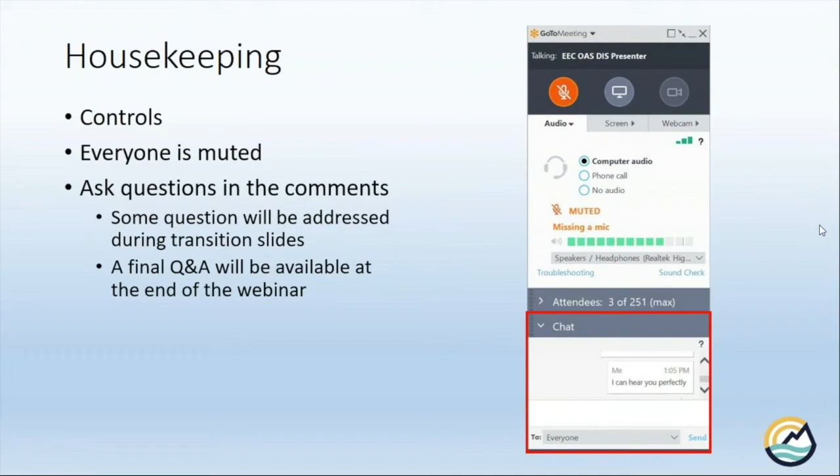Quick outline, we're going to talk about the old permitting process. A lot of you guys are familiar with that. And then we're going to talk about the new general permit. We're going to give you a quick overview. And then we're actually going to dive into the permit itself. So the email I sent out to everybody should have had the floodplain general permit attached to it. So if you want to open that up and follow along as we go through, I tried to organize this in the same manner that the general permit's laid out.

So we're going to talk about the permit coverage. We're going to talk about exclusions and eligibility. We're going to talk about permit requirements and other conditions, and then we're going to talk about finding and using the general permit.

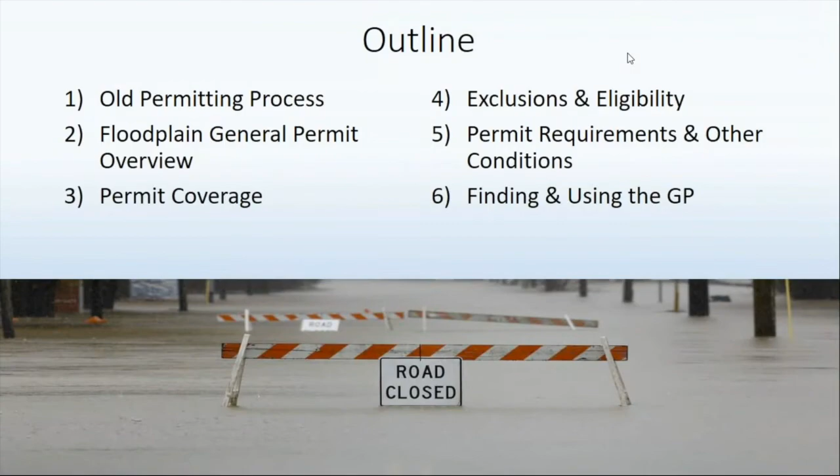So floodplain permitting. So KRS 151.250, that is the Kentucky Revised Statute that gives the Energy and Environment Cabinet and the Division of Water, as part of that cabinet, the authority to require floodplain permits anytime you're working along or across a stream. So the statute, really all it's telling us is that we shall issue a permit. It never really said how that permit had to be issued.

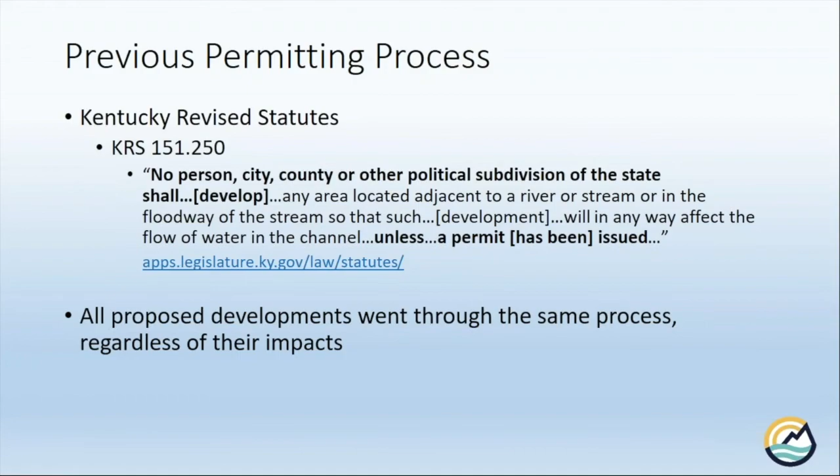So for the longest time, no matter what you were doing in the floodplain in Kentucky, you went through the same process, regardless of if you are a half-mile long load-out facility on the Ohio River loading into barges, or if you are planting a tree in your backyard. Doesn't matter. We treated everything the same for the longest time.

What we were kind of finding is as we were requiring these stream construction applications and the public notice, we were finding that for some of the projects, you were spending a lot more time and effort getting it permitted than the project actually took itself. Or another factor we also saw frequently was the cost to run the newspaper notice cost more than the project would itself. So we were really doubling the cost of what people were wanting to do.

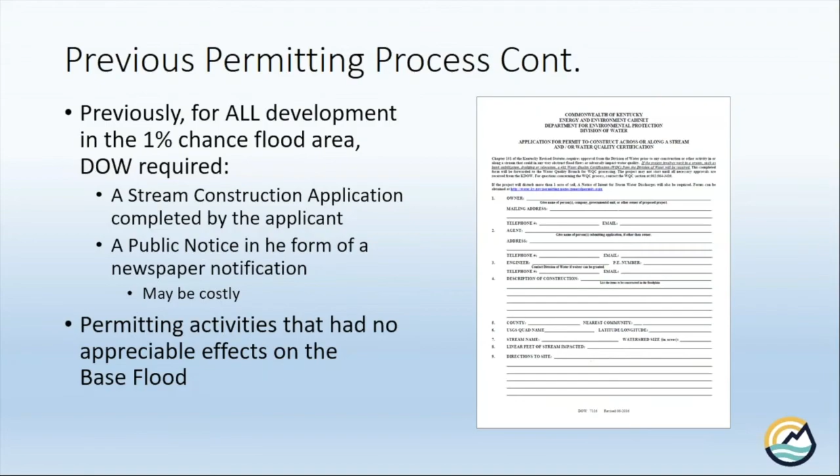We also found that, we have 8 people in the floodplain management section at Division of Water, 5 of which are engineers. We had a lot of very intelligent people spending a lot of time on things that really didn't affect the base flood or the base flood elevation. So what we decided to do as we were looking through our regs and trying to decide how can we make this better, we came up with the idea of issuing just a general permit.

And so what this is intended to do is, we spent all of 2019 and the first couple months of 2020 putting this permit together, trying to decide what do we want it to cover, what do we not want it to cover, what mechanisms do we need to have in place to enforce it and make sure people are complying with all of the federal and state requirements. That was our big key. We wanted to issue this, but also still meet all of our federal and state statutory requirements.

The general permit was public noticed back in, I believe it was late April, early May 2020. It ran for a month. We received comments from several different sections, biggest being the Home Builders Association of Kentucky. We reviewed all the comments, we addressed everything, and we actually sent letters back to everybody who commented. And then as of July 1st of this year, the general permit went into effect.

When that happened, I actually emailed copies out to all of the local coordinators that are on the call. I sent a copy, it would have been about July 9th or 10th, I believe, as well as we updated the Division of Water's website to where you can find the general permit online. We'll talk about that later in the presentation.

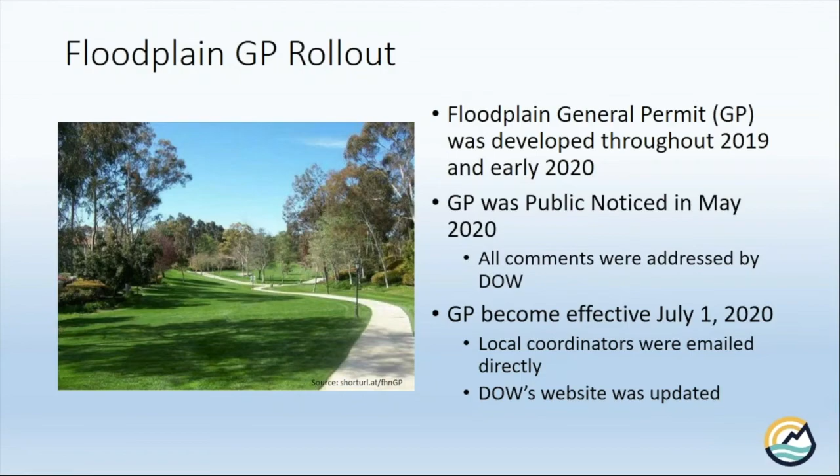So the general permit, essentially what it is, is it's intended to just give out essentially blanket coverage for certain activities that have no appreciable impact on the base flood. So there are some things you can do where, no matter how big or small the stream is, you're not going to affect the base flood when it happens. So that's what we regulate, the 1% chance flood. So when you hear me say base flood, that's what I'm talking about, is the 1%, or what they used to call the 100-year flood.

The general permit pre-approves those activities, and it has already done the public notice, so it meets that statutory requirement. And it's available to anybody in the Commonwealth. So whether you are a private citizen, a community, or anyone else, the general permit, if you can follow everything in it, applies. We modeled this permit after what the Army Corps of Engineers does with their 404 permits for the Clean Water Act, and what our water quality section does with the 401 certifications.

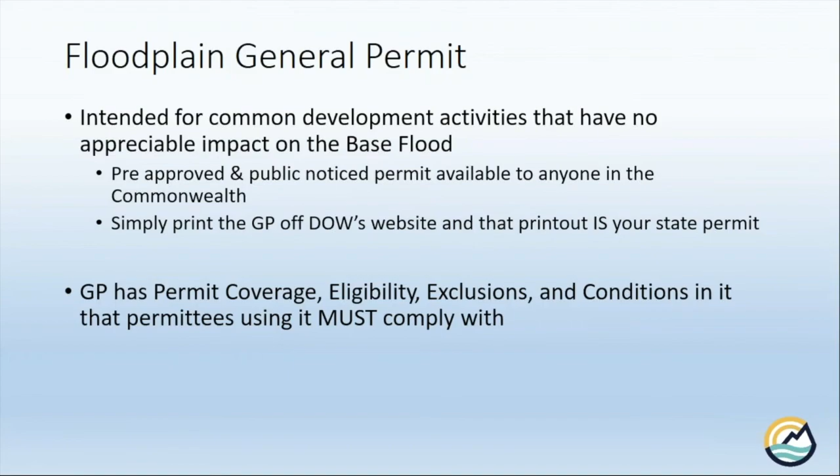So the printout that you get off of our website is your permit. You don't have to apply, you don't have to run a public notice. That printout, once you print it on paper, is your permit. The general permit has permit coverage, eligibility, exclusions, and conditions that whichever permittee is using it has to comply with. And that's what we're going to spend the majority of this presentation talking about, is what are those different sections of the permit? What are they talking about? What are they trying to convey?

So again, guys, if you have questions, I am monitoring the chat box. Feel free to ask questions as we go through. So if you have the permits in front of you, great. We're going to just, like I said, follow along section by section. If not, you can just read everything that's on the screen.

So section 1, permit coverage, really what this is talking about is what all is this permit trying to do. So it's talking about how this permit was issued in accordance with Kentucky statute and Kentucky regulations, as well as the federal regulations. And we're going to talk about what are some of the things that Kentucky was doing previously that didn't quite jive with the federal regulations that this permit is trying to address later on. The permit coverage talks about how the general permit works.

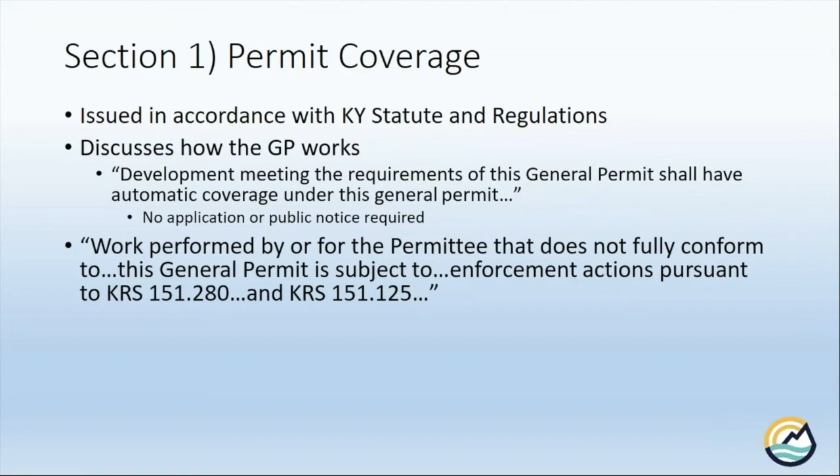So development meeting the requirements of this general permit shall have automatic coverage under this general permit, meaning you don't need to apply, you don't need to run a public notice in the newspaper or anything like that. If you qualify for the general permit, you're automatically covered. It also talks about, how do we enforce this? So work performed by the permittee that does not fully comply with this general permit is subject to enforcement pursuant to those 2 Kentucky statutes, which basically says what we can do as a division or as a cabinet to enforce those actions. So enforce what they should have been doing.

If they don't already know the answer to this question, the permittee needs to contact Division of Water to see if a water quality certification or a stream construction permit is needed. There are 2 contact email addresses in the permit coverage section that give them the contact. So who do they need to talk to to get the answers to that?

And then lastly, it says that the permittee is liable for any damage resulting from the activities covered under the general permit. So if you do something and it ends up resulting in damage, essentially the permit says you as the property owner, you as the permittee, accept all liability for any resulting damages. So it's your property, you're ultimately responsible for what happens on it. Okay.

So we had a question come in that says, if you don't have to apply for the general permit, then how can it be pre-approved and public noticed? It was pre-approved. So I mentioned that the general permit was public noticed back in May. It ran out to anybody who wanted to comment on it. So that was its public notice. And the permit itself is pre-approving certain activities. So the permit is not approving itself, it's approving activities that you can do under the permit. And we'll talk just a second here, Kathy, about those.

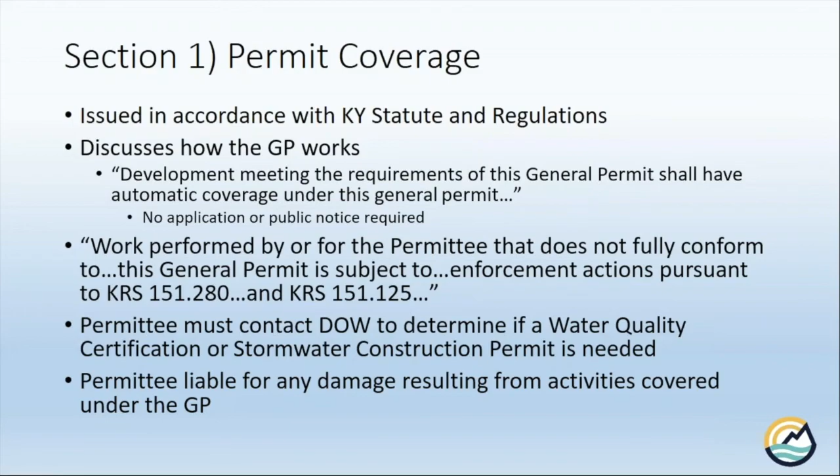So the next two sections, eligibility and exclusions, this is where we're going to spend quite a bit of time, because I want to give everybody a sense of what specifically is excluded from this permit and what is specifically covered. So section 2.1, the exclusions, there are certain things that automatically do not apply to the general permit. So if any of these apply to your project, you cannot use the general permit. You have to go through the normal permitting process and get an individual.

So if it's not explicitly listed in section 2.2 under the eligible activities, the general permit doesn't apply. Even if you think your project is not going to have any effect on the base flood or the base flood elevations, if it's not explicitly listed, you can't use the general permit. If there's any change to the BFE, so even if it is explicitly listed, if there's going to be any change in base flood elevations, you cannot use the general permit.

If an individual permit for 401 or 404 is required by the U.S. Army Corps of Engineers or Division of Water, the general permit doesn't apply. Individual permits typically are required anytime you are doing very large scale projects, or when you're working in special use waters, exceptional waters, or outstanding state resource waters.

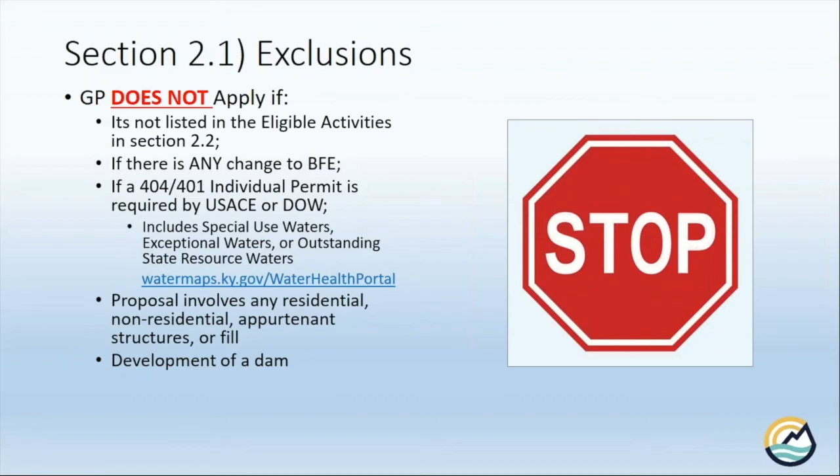Anytime the project involves any residential, non-residential, or appurtenant structures, appurtenant being like a detached garage, barn, one of those small portable warehouses, something like that, or if there's any fill material. If you bring any fill in, the general permit does not apply. Or anytime you're developing a dam, or I should say structures that impound water. So it doesn't even have to qualify to be a dam. If it's impounding water, the general permit's not going to apply.

And then the last thing that this is saying is, we reserve the right at any time to require an individual floodplain permit. So even if your project is explicitly listed in the next section, if we feel there may be impacts to somebody else, Division of Water can say, nope, submit an application, run a public notice, we're going through the normal process. So we can do that at any time. So if you guys are concerned that a project is going to affect a neighbor or an adjoining property owner, we can always go back and say, let's do a full permit.

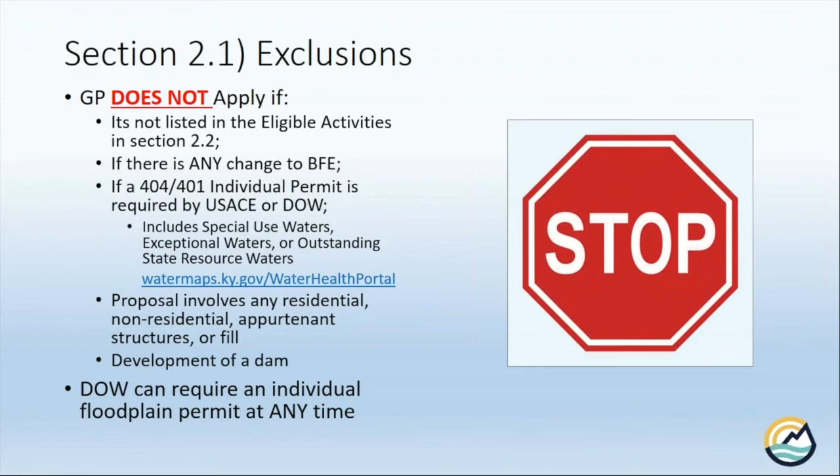Okay. Still don't see any questions in the chat box, so we're just going to keep rolling right along.

Section 2.2 of the permit, this is the eligible activities. So these are the activities that are approved under this general permit, the activities that you can actually do with this permit without ever having to apply. Like I said, we're going to spend a good bit of time on this. And I'm going to show you guys visual examples of what I'm talking about.

So the first one is any development that is done by the U.S. Army Corps of Engineers. So the Army Corps of Engineers, they oversee 404 permits through the Clean Water Act.

They also oversee Section 10, which is the navigable waters, I believe. So they are responsible for dredging operations along major rivers to allow for ship navigation and things like that. They also maintain and operate locks and dams. So if they would be doing maintenance, for example, on their lock and dam, this general permit is going to cover the activities that they are doing themselves. Now, if you get a 404 permit from the Corps, that does not fall under that because you're doing it, not the Corps.

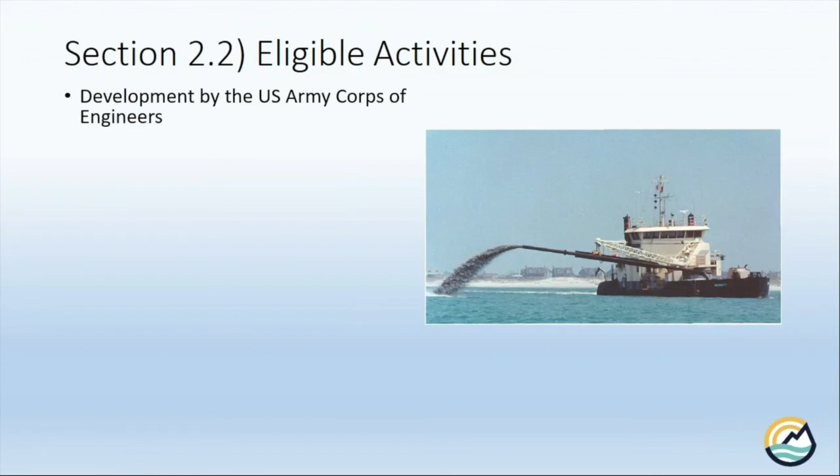The next one is open space as outlined in 44 CFR 80.19. So this is a federal reg that says what you can and cannot do in mitigation buyout areas. So if you are putting in a walking path or a bike trail, or using open space as a way to maintain flood storage or something like that, if it's listed in that CFR, you can do that activity using the general permit.

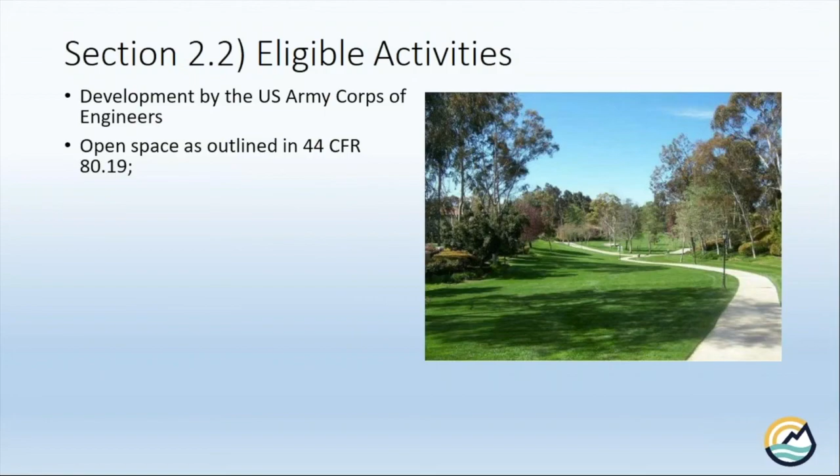Vegetative or riparian buffers. So if you are planting trees, shrubs, or grasses along a stream bank to allow for a buffer where any soil erosion or sediment may be in storm water, if you're putting that riparian buffer in to let that sediment drop out, you can go and do that with the general permit.

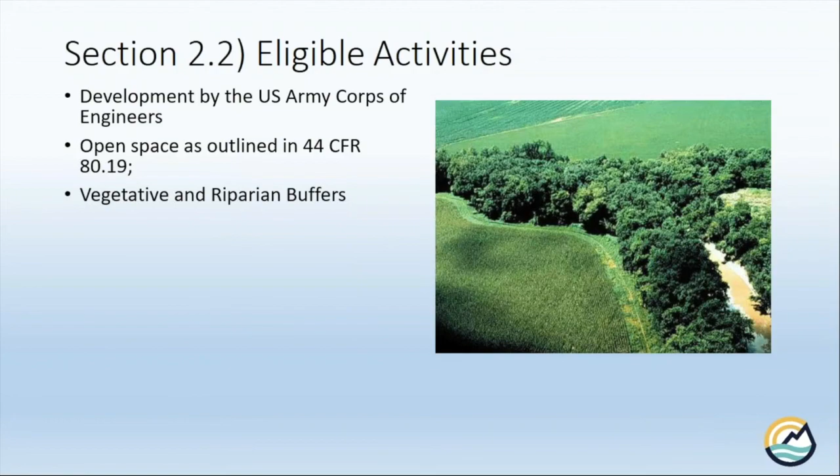Stream obstruction removal. So this is one where for a long time, we weren't quite following federal requirements to the letter of the law. Federal regs don't actually allow for any exclusions. So you either issue a permit or you're not in the floodplain. But for a long time, what Division of Water did was if you have storm debris that would wash up against a bridge or a culvert that would cause the next flood to be worse, we wanted you to get that material out.

So what we allowed you to do was to remove that material from the floodplain, either from the stream bank or from a bridge. So you never actually got onto the sides of the bank or in the water itself. We wanted you to remove that material and take it outside the floodplain. We let you do that for a long time, but we realized we weren't actually doing what we were supposed to. So this general permit allows you to do stream obstruction removal, which is like pulling sticks and limbs and big gravel deposits away from stream crossings, as long as you can follow the watershed-friendly stream maintenance guide. That's posted to our website.

There are some requirements in that, like you can't work during fish spawning season, and you can't put machinery in the water. You have to do it from the bank or from the crossing itself. So if you can follow all the guides in that stream maintenance guide, we want you to remove that debris, and now you are permitted. You're legally covered under this general permit for doing that. So if you have road crews or road departments, this general permit would apply to them, so they can pull that material out and maintain those crossings so that they're ready for the next event.

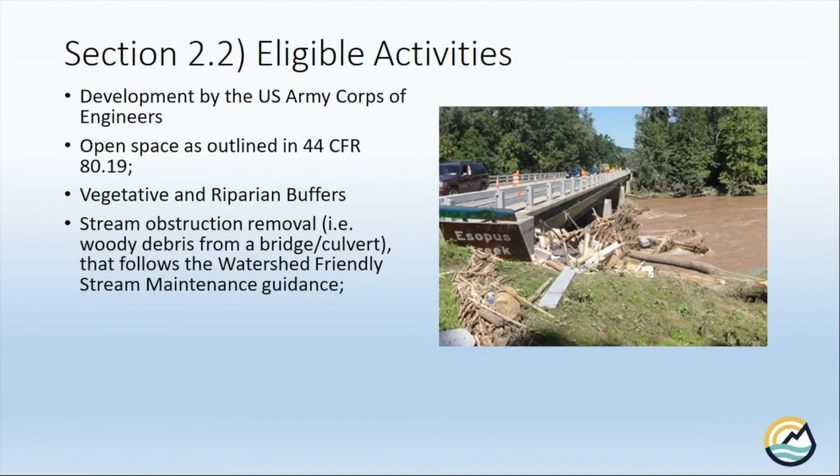And then normal property maintenance, is what we're calling it. So if you are trimming brush from around or behind your house, trimming limbs, pulling up or pulling down vines, whatever. If you're doing property maintenance like cuttings, plantings, or temporary debris piles, if you can do it by hand, it's going to be allowed under this general permit. You don't have to get a state permit from us.

Now, with that being said, if they're doing a debris pile, like the pile of sticks I have shown here, they can't leave that there indefinitely. They're allowed 15 days to either haul it off or to burn it. Whichever they want to do, we're fine with from a floodplain perspective. But they're only given 15 days to do something with it. Now, people will often use chainsaws or power pole saws when they're trimming limbs.

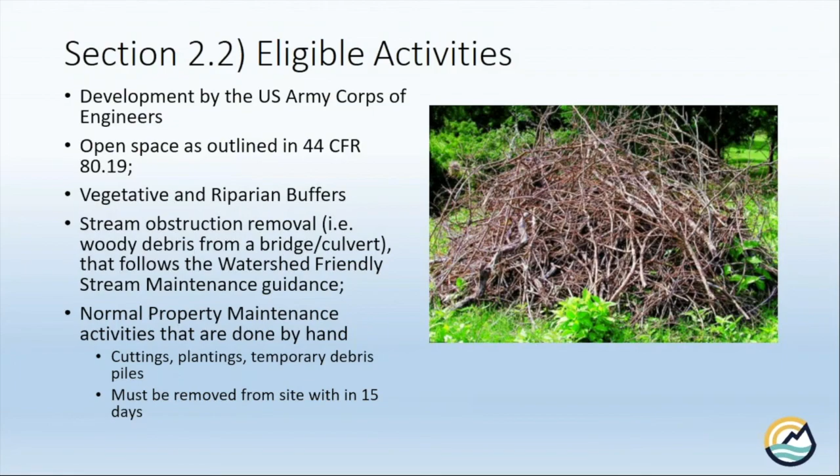So you can do that. Those are handheld devices, but you have to be able to also haul it away by hand. So the automatic first question I got from our field office is, well, what about logging operations? And logging operations would not apply to this, because while I can cut a tree down by hand, I can't haul it off without some type of major equipment.

I'd need a tractor with a front end loader. I would need a backhoe or something like that. So if you could throw it in the bed of your pickup truck or throw it on the back of your side by side or something like that, those are fine. But if you can't move it by hand, it's not going to fall under this general permit.

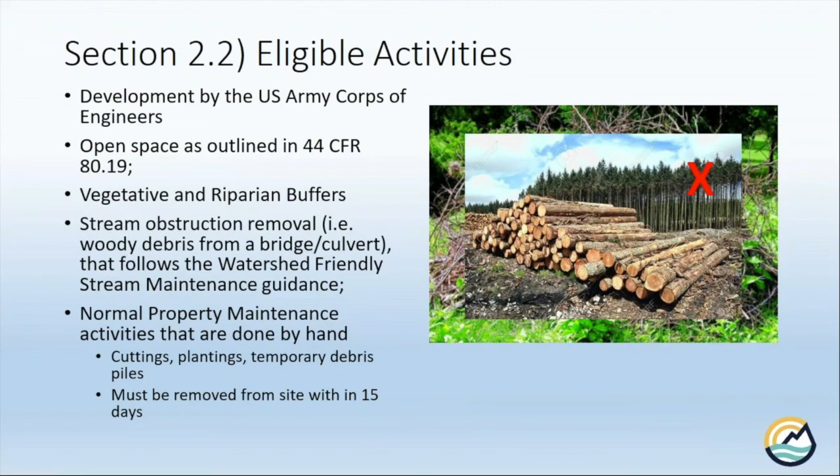All right, moving on in the other activities. And again, guys, I'm following the permit, so as you go through, you can take notes and things like that. The next activity that's approved is a below grade swimming pool that is installed outside of a regulatory floodway. So as long as it's not in the floodway and you're putting in a below grade swimming pool, that's going to be covered under the general permit, because if you're just digging a hole, installing a pool, and then filling in back around it, that's not going to affect the base flood elevation. So it's going to just go ahead and be covered under this permit.

If you have to do a whole lot of grading operations, or if you have to bring in fill or something like that, that's a different story. Again, we have that right to still say, well, we want to take a full look at this with a regular permit. But if all you're doing is digging a hole and then backfilling around it once the pool's installed, that's fine.

Next is placement of utility poles, open frame towers, or monopole towers with below grade foundations. We've actually had engineers spend an hour or more of their time looking at putting in just a single or just a couple of utility poles. No matter how small that stream is, that tower by itself is going to so negligibly affect the base flood that it's not even going to be mappable. These are going to go ahead and be approved under this.

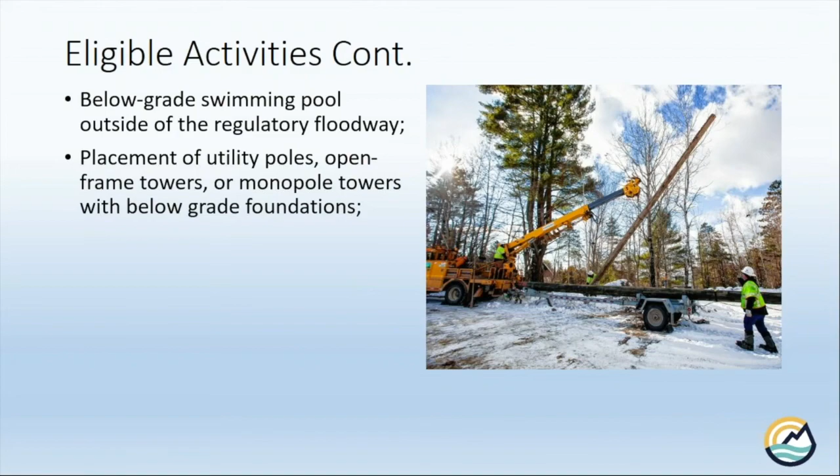Okay. All right. So moving on from the utility poles, below grade utilities and subgrade drainage features. So if you're installing a water line or a sewer line on your property without crossing the stream, or if the utility company is using directional drilling or something like that, where they're drilling under a stream, as long as you're not affecting the stream banks or the stream bed itself, that is an eligible activity under the general permit. So all you're doing is digging a trench, laying a sewer pipe, and then filling the trench back in. That's fine. Those are, again, not going to affect the base flood elevation.

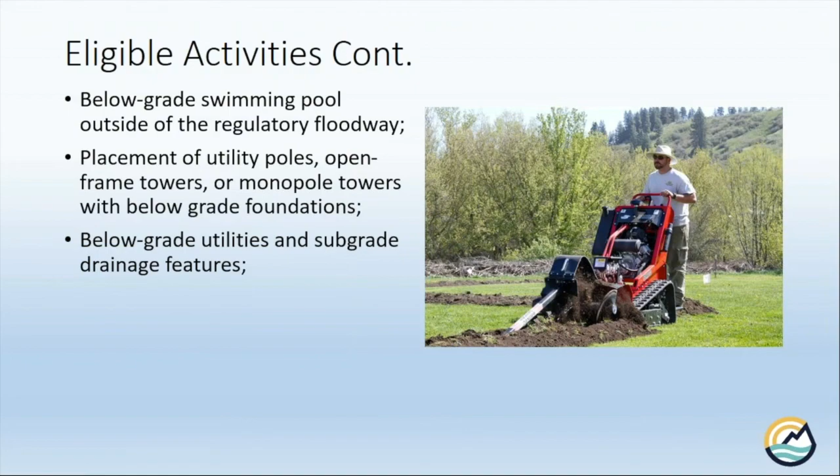So we're not too concerned about that. There's no reason to have an engineer spend too much of their time reviewing that application. There's no reason to have somebody do a public notice about that. Open style guardrail along an existing roadway. So this is one of the ones that when we put it in the general permit, the wording was picked very carefully.

Open style, there's open style and closed style when you look at, I guess, transportation guidance manuals. Open style guardrails are the ones that would allow a free flow of water, either under, through, around, or something like that. So you can see from the pictures here, these are what we call open style.

So the picture on the top is a cable system. The picture on the bottom is the W-beam guardrail. So these are pretty common nowadays that you will see a lot of on county and state roads. The cable system you see a lot now on interstates that have been redone in the last couple of years. They're there to kind of absorb some of that impact. These are open style because you can very clearly see water can easily flow under, through, or around them. And the poles in the ground themselves are not going to affect the base flood.

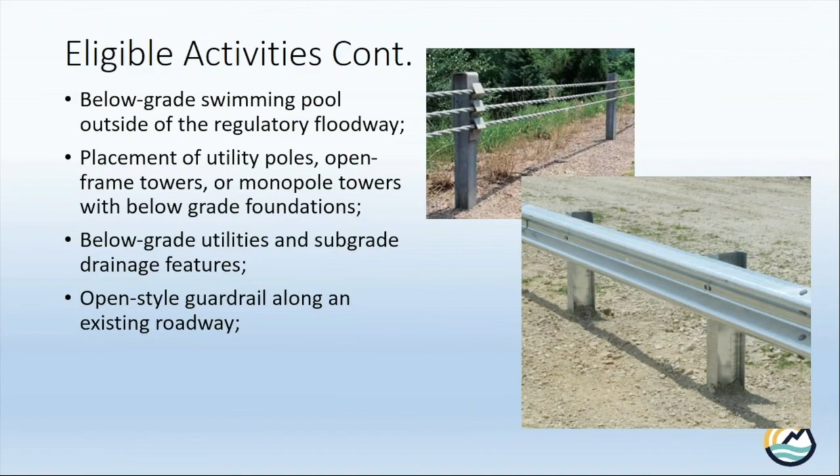An example of one that is not open style, so this is what they call a New Jersey barrier. This is also a guardrail, but as you can see, water can't freely flow through or under one of these. So this is going to act more like a dam or a fill material or something like that that is not covered.

Whenever the permit was public noticed, we also sent out a fact sheet with a set of definitions for what we considered open style and what we did not. So if you're interested in that, reach out to me directly. I can share that with you, or I can share the source where I got a lot of these guardrail types, so you can take a look for yourself what can be done and what cannot be done with this general permit.

So we had another question come in. Kate asked again about the swimming pools. Even a below ground pool has electricity and a pump, so how does that play? If it's subgrade, again, it's going to be fine. So below grade utilities we're okay with. Pump house, where you have to run electric up and into it, or if you have an above ground pump or something like that, that is going to be separate.

So, installing the pool itself, digging a hole, pouring the concrete, dropping the liner, backfilling around it, that's all fine. But the above grade utilities may have to be considered separately. Otherwise, you have to just go through the full normal permitting system.

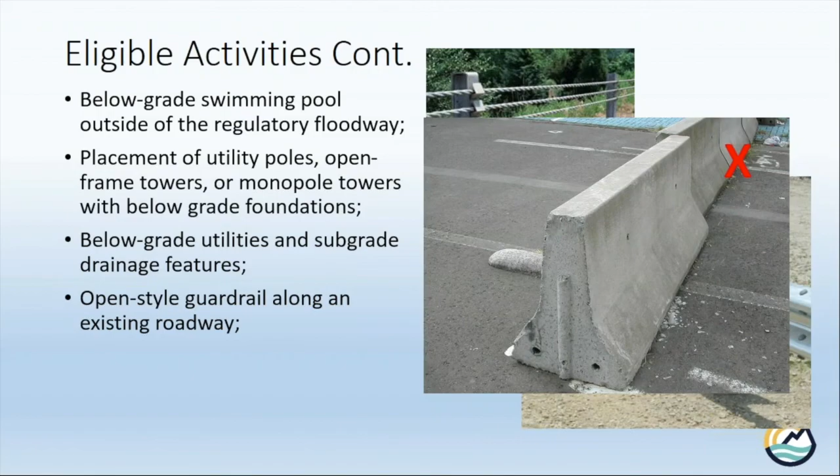Okay, moving on from the guardrails. Geotechnical investigations, archaeological investigations, or the installation of monitoring wells. So this is kind of on the same level as the below grade utilities. A geotechnical investigation, what they're doing here is they're drilling a hole, looking at either the soil or the rock layers underneath, and then they will typically replace it.

Same way with an archaeological investigation. They'll go out, dig a hole looking for archaeological artifacts, and then replace the dirt or the material where they found it. And then the monitoring wells are typically underground or something like that. So those would fall under this general permit. No more are they going to have to apply for each one of these individually.

Another question just came in: what about a temporary flume pipe and stone crossing in a stream? Is that covered? So Brian, I'm not necessarily sure what you're talking about there. So reach out to me directly after this, and we can talk more about specifics, because I'm not 100% sure of what you're asking there.

Would a stormwater injection well fall under the general permit? So Nick, that kind of depends. Is this going to be a permanent feature, or is it going to be something where you dig a hole and then fill back in over it or something like that? So this is one of the ones where we knew when we issued this there were going to be a lot of particular instances where we were going to have to make decisions. So Nick, this is one where we just need more details.

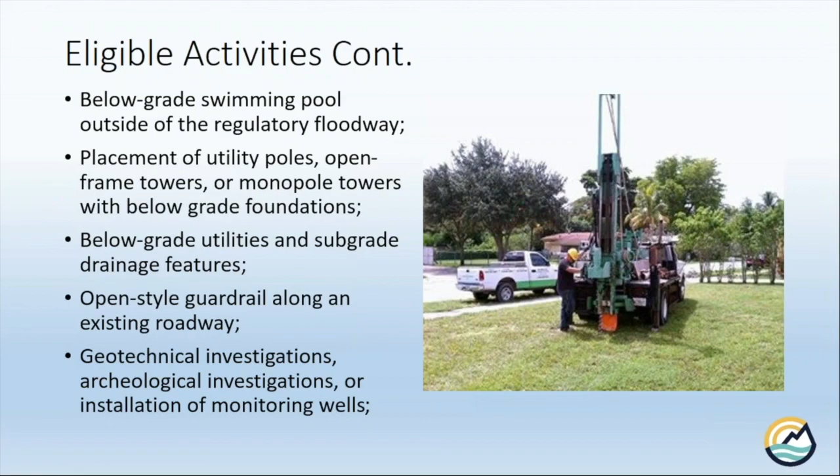All right, good questions, guys. Thanks. So we're going to keep moving on.

So it's made to drain the water either to a creek or to a ditch out along the road or something like that. So this is going to be very small, again, made for rainwater, not necessarily even stormwater. So this is more for positive drainage away from your building. And then it cannot be mapped as having its own floodplain.

So this is another thing where if you're one of the folks from Western Kentucky, a lot of what you call ditches out there are actually the stream that's just been channelized into a ditch. So we were very careful not to use the word ditch anywhere in this because it could be misconstrued that, oh, well, this is the ditch, so I can go out there and maintain it. That was not what this was intended for.

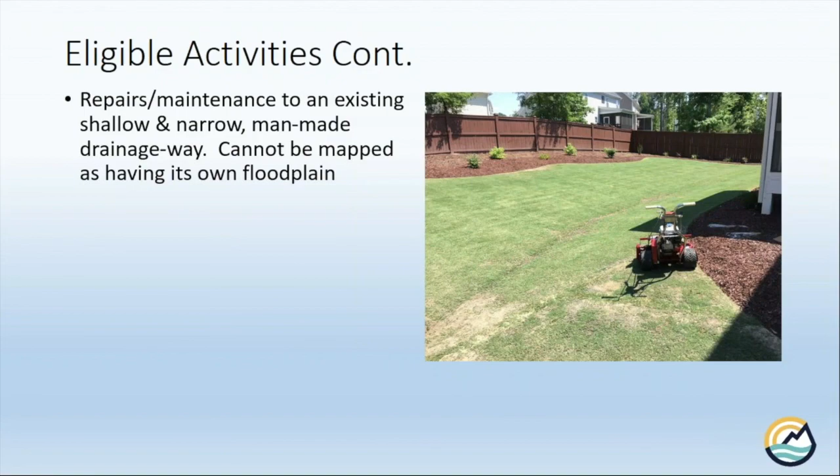But to give an example, if I have a small swale between my house and my neighbor's house that drains into the ditch in the backyard, you can maintain it through that, basically just to keep it clear of debris or something like that. But again, the wording was chosen very carefully to make sure that you didn't have people doing these huge maintenance projects thinking they're covered under this general permit.

Robert Hewitt asked, should equipment buildings within the compound lease area associated with open frame towers or monopole towers be issued permits? The answer, Robert, to that is yes. So the tower itself, as it's installed, if it has below grade foundation, the tower itself is fine. With a cell tower, for example, a lot of times you'll see a maintenance box or something like that installed separately. Those are going to require normal state and local permits.

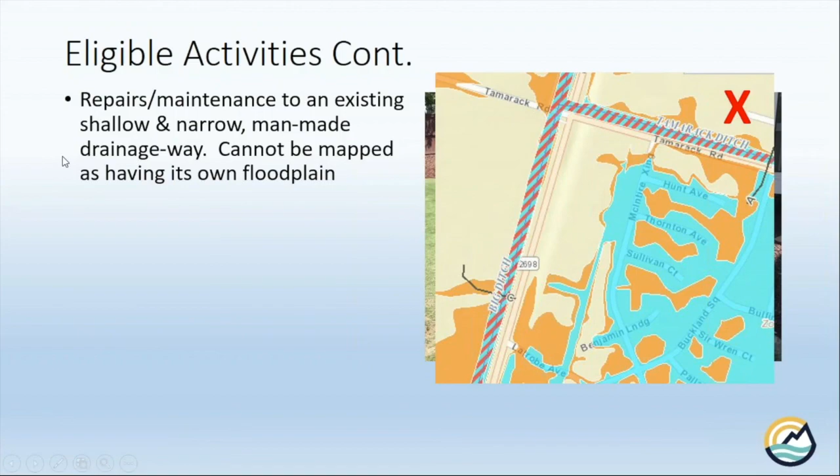All right. So moving on, the next one is development of a fence that does not impede flow during a base flood event. So fences are another one of those things where, as long as they don't impede water, so as long as they're not just a solid rock wall or something like that, water will very easily flow through a chain link fence or a wood privacy fence, for example.

Small events will flow through them, larger events will lay these over. So you're not going to have a whole lot of debris from the fence or anything like that. It's not going to really impede water or change the direction of flow. It's going to, like I said, bowl them over. So on something like that, you can install a fence in the floodplain under the general permit as long as you don't cross the stream.

Again, as soon as you go into the stream itself, other permits and things like that are going to be required. So a privacy fence between me and my neighbor, I can put that up, but a fence going across the stream to keep my cattle from moving from one field to another, that's something that's totally separate.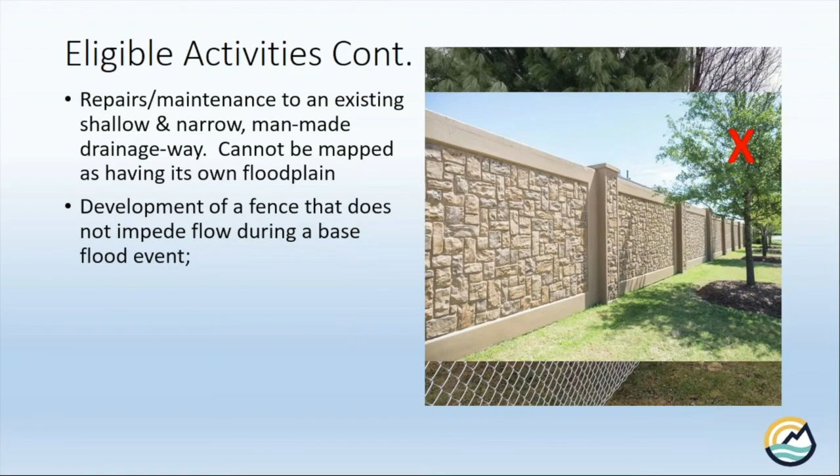Locating an RV that is fully licensed and ready for highway use in the floodplain for the base flood event for less than 180 consecutive days. Believe it or not, we used to issue permits for RVs because if you read our regulations, they're not just covered or they're not just allowed. So you actually had to get a permit for an RV. Well, now you're covered under this.

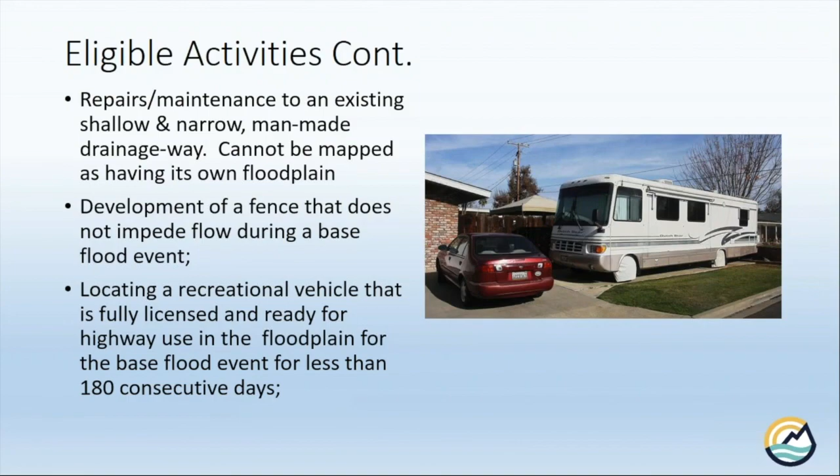So as long as it's fully licensed and ready for highway use, meaning it has license plate, it has tags, it has insurance, it's on tires, the tires are inflated and ready for road use. And as long as you leave it there less than 180 days. So it has to either be lightweight movable, meaning I can pull it with a small pickup truck, or it has to be self-propelled. So you can get in it and drive it away as is. So something like what's shown in the picture where it's just an RV parked on the side or back of their house, that's fine.

Rodney asked, what about a structure that is elevated on posts like those on the beach? So no, as soon as you say structure or building, the answer, Rodney, is going to be no. No buildings, no structures fall under this general permit.

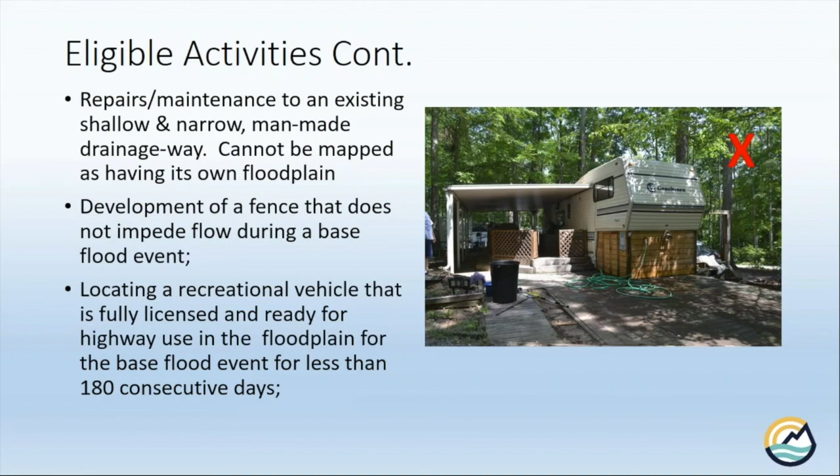Okay, moving on. So we're starting to run a little shorter on time than I expected, so I'm going to cover these next two a little bit faster. Removal of gravel or vein materials from a stream for personal non-commercial use. It has to be done in accordance with the watershed-friendly stream maintenance guide, cannot be sold or transported on a public road, and then 50 tons or less in 12 calendar months. So this is another one where you're allowed to remove gravel from the stream for your driveway or something like that. Has to be, again, personal use, cannot be sold, and you can't transport it on a public road.

So as soon as you sell it or as soon as you transport it on a public road, you all of a sudden need a permit from DMRE, which is Division of Mine Reclamation and Enforcement. They have a non-coal mining permit. Even if you are going from one property you own to another property you own, if it's crossing a public road, it requires a permit from them. So it wouldn't apply. But if I'm pulling out gravel from behind my house and using it as my driveway, that's fine.

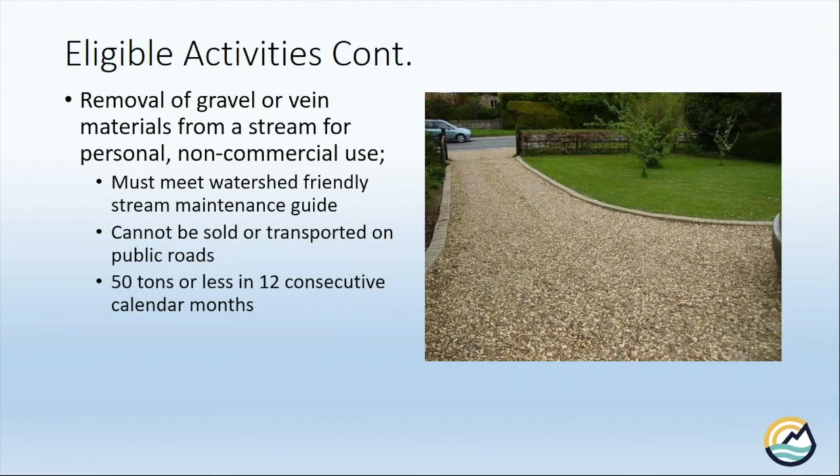And then the last one is development in a watershed less than a square mile. So this is another one where state regs and federal regs didn't agree. State regs, this was actually anything in a square mile or less was exempt unless it was a building, fill, or dam. Federal regs do not allow exemptions. Even though state regs do, federal ones don't. So what we've done is we've actually just permitted it under the general permit.

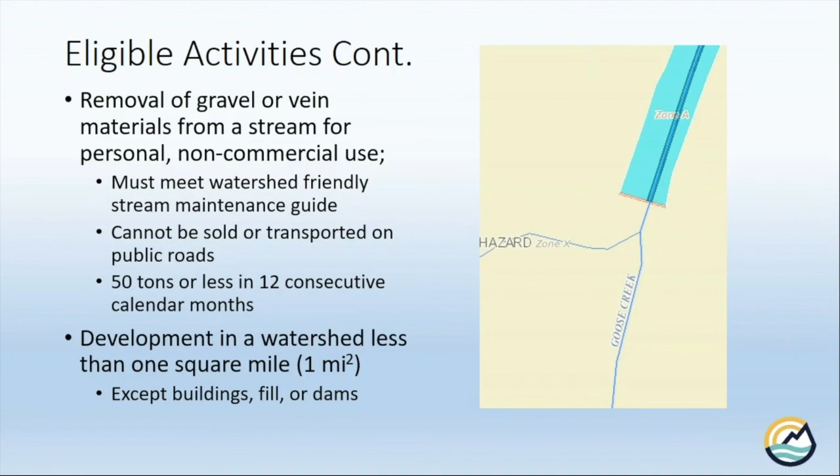Kate asked, what if it is being removed for maintenance and has to be removed from the floodplain? Kate, I'm not really sure what you're asking there. So can you ask it again a little bit clearer for me? And while you're doing that, I'm going to keep moving on, guys, because I want to respect your all's time and we have a little bit to cover yet.

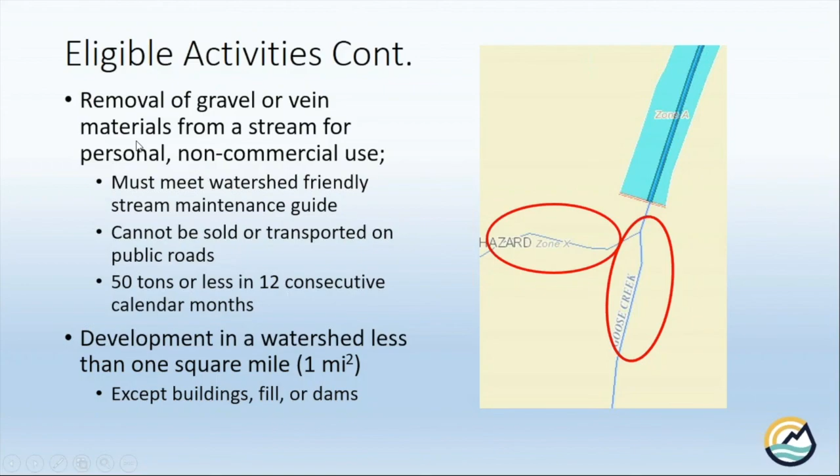So moving on. So permit requirements and other conditions. There are several conditions, just like any other permit you would get, that you have to follow for the permit to be valid.

So there are several things the permittee has to do. One, they have to have a copy on site. This is your permit. Knowing it exists is not good enough. You need to have a copy, whether it be digital or on paper. You need to be able to show that to a neighbor or an inspector if they come on your site.

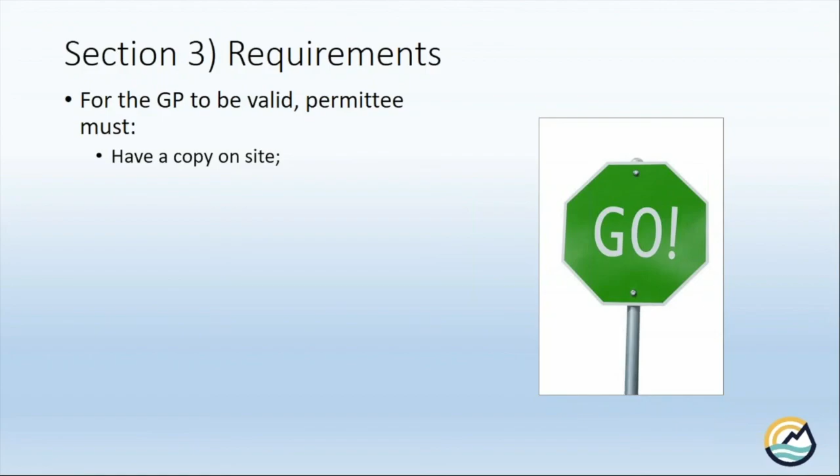Two, local permits are still required. So this general permit is your state permit, but it still has conditions on it that a local permit is required. So for all of my floodplain coordinators on here, you're going to still be issuing local permits that go along with these. And we're going to talk in a couple more slides how that's going to affect you guys at the local level. So hold those questions for me.

Any excess materials must be removed from the floodplain. So we talked about installing a pool. Any leftover material, which there's probably going to be some, has to be removed from the floodplain. I believe it gives them like 15 days or something like that to do it. But you can't spread it around on the backyard or dump it down by the creek or something like that. If you're doing it under the general permit, all excess materials have to come out of the floodplain.

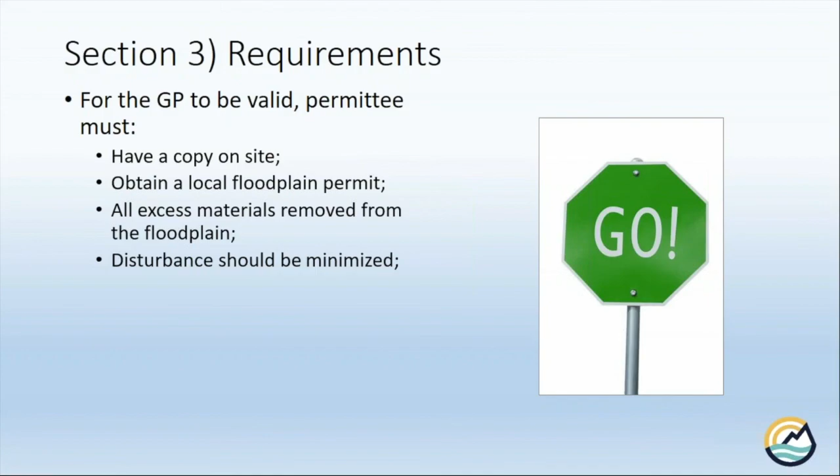Disturbance should be minimized, so you need to take action to make sure you don't have a whole lot of sediment runoff or something like that. You need to seed once you're done doing your activity, or you need to install straw bales or silt fence or something like that to make sure you don't have sediment running off your site.

Mobile equipment in the stream is prohibited. So if you have to put equipment in the stream, you do not fall under the general permit. And then you have to take measures to prevent any type of spill of fuel or lubricants or anything like that from entering the water. If something like that happens, you need to contact us as soon as you absolutely can. So that's it for the requirements.

Kate had a question: if you have gravel removed for maintenance and it has to be removed from the floodplain, it seems like the condition of not traveling on roadways prohibits maintenance removal of gravel. So Kate, it just doesn't fall under this permit. So again, if it doesn't specifically fall into this permit, you can always go and get the normal individual permit. This is just what's pre-approved and has been pre-noticed and all that. So you can still do everything you just mentioned. You just have to go through the normal individual permit process.

All right, so it doesn't look like we had any questions on the requirements. And again, guys, I'm gonna address that obtain local floodplain permit here in a couple slides. So hold on to any questions there.

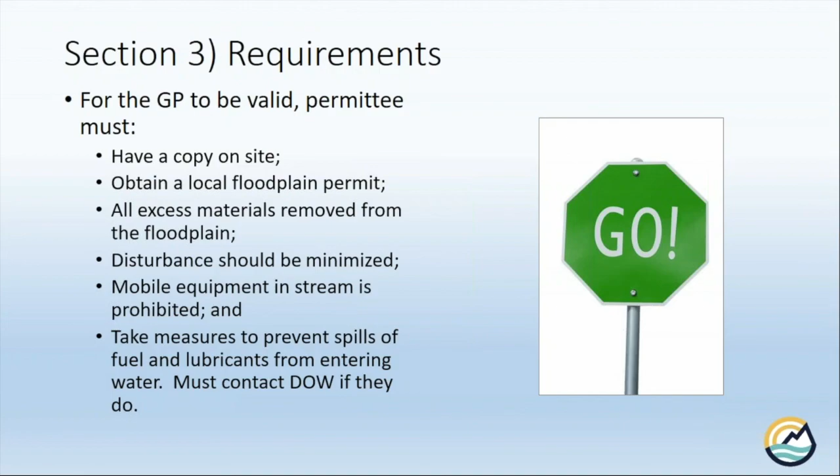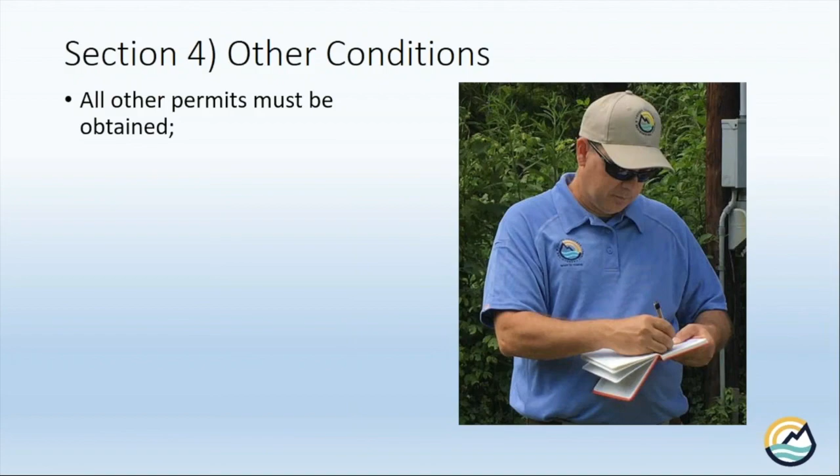And then section 4 is going to be other conditions. This is going to be other things that they still have to do. So again, all other permits still need to be obtained. So if you need a 401, 404 permit, if there's a local building permit, if there's endangered species, anything like that, you have to get all other permits that go into it. No application is required for the general permit. Again, you don't have to apply, you don't have to send anything in, you don't have to public notice. All that's been done. If you meet all the conditions, this is your permit.

Permittee must comply with all conditions and is subject to enforcement. So again, just because you qualify doesn't mean you get free rein to do whatever you want. You still have to comply with everything in the permit. Permittee has a duty to provide information upon request. So if you see something that is concerning at the local level, you can reach out to us at Division of Water, and we can send requests to that property owner. They have to tell us what's going on, how do they know that they comply, things like that.

So they're required to respond to us if they're using a general permit, and then they have to allow any inspection and entry onto the site. So if you're concerned, we can send an inspector out. He can take a look and can make that determination on whether or not they need to contact us in Frankfort.

Kathy, I see your comment, and I'm going to reach out to you directly after this, and we can talk then.

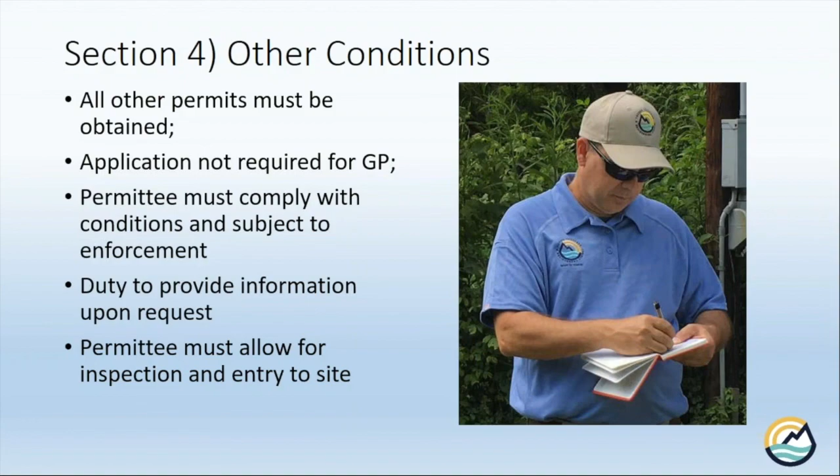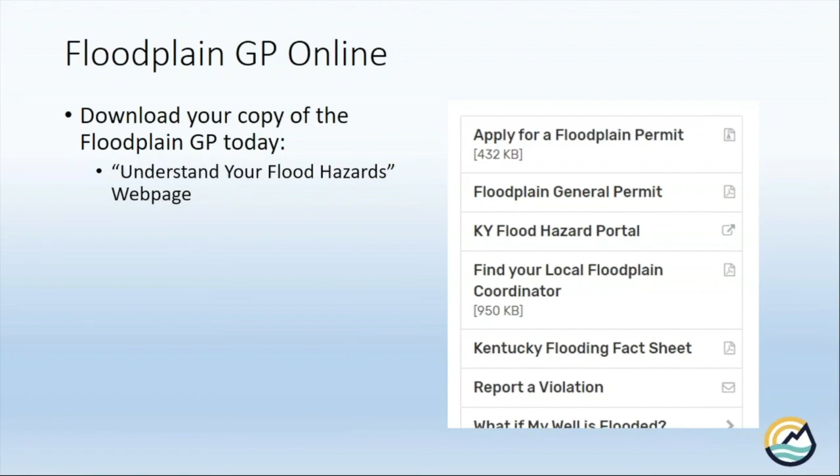All right, so finding and using the floodplain general permit. Right now, it is live on our website, so you can go on and actually download a copy today. If you go to our Understand Your Flood Hazards webpage, on the right-hand side we have quick links. The floodplain general permit is the second one there, available for download. If you comply with everything on it, you can start using it today.

If you don't comply, immediately above it is the regular apply for a floodplain permit. Those two are side by side for a reason. If you're working in a floodplain, you're going to have to do one of those two. And again, I can't stress this enough because I've gotten several questions on this already: the printout is your permit. Local permits are still required, but the printout is your state permit. You don't have to go through the normal process as long as you can do everything on that piece of paper.

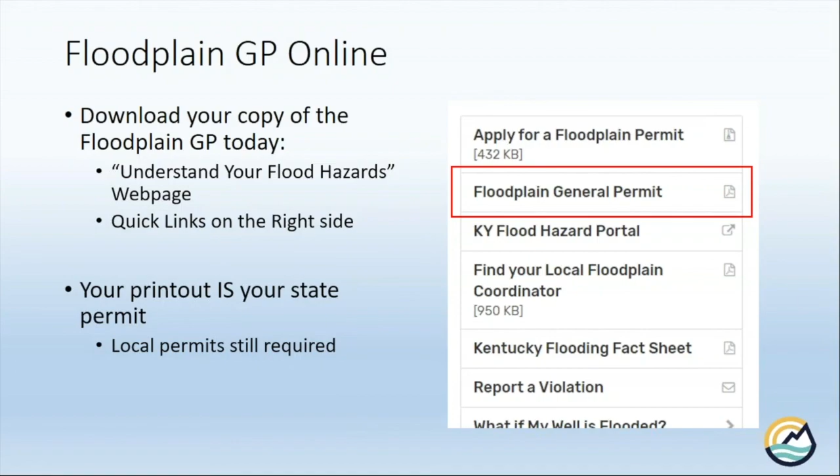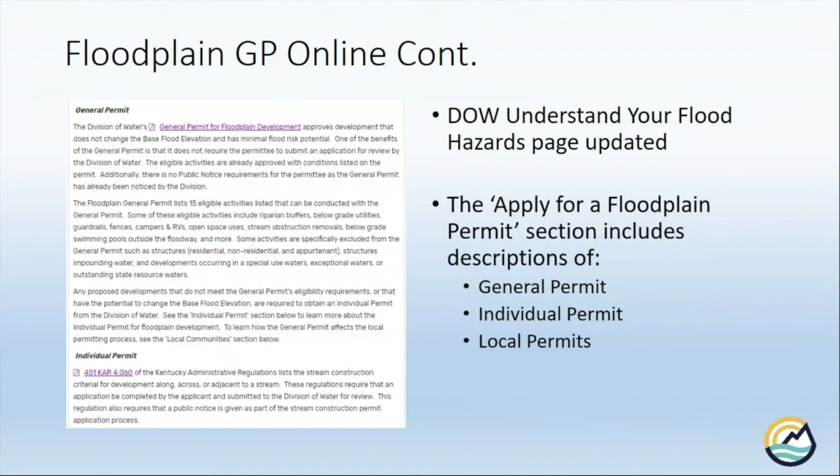We also updated that website. The Understand Your Flood Hazards webpage was updated, so the apply for a floodplain permit section actually includes descriptions of general permits, individual permits, and also local permits. It gives you a rundown of the two ways you can get a state permit, and it also refers you to the locals for the local permit as well, all online.

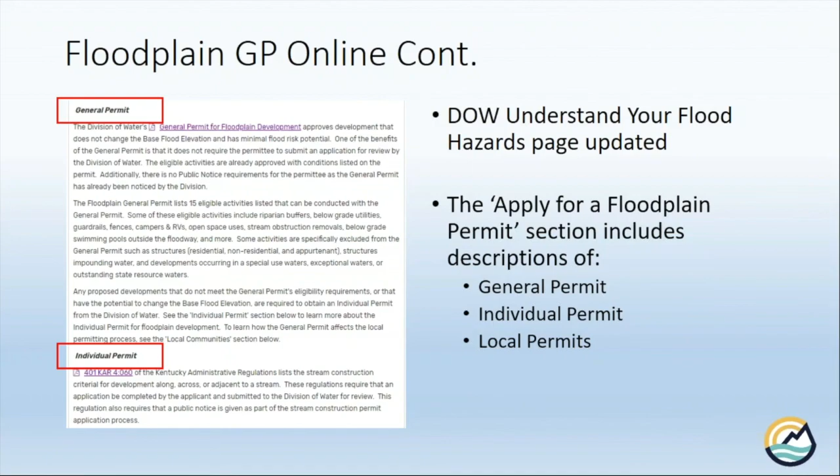So how is this going to affect your local process? I am in the process right now of developing a template that you can use at the local level that will, just like the state permit, automatically permit certain developments. I'm still working through what it's going to look like, how it's going to work with your ordinance, and things like that. So that is coming down the pipe. Hopefully in the next couple weeks, you'll be hearing from me again and I'll be sharing a template with you.

In the interim, keep issuing permits like you are today. If they're using the general permit from the state, go through your normal process and issue them a local permit. Again, just because they have this state permit doesn't remove the requirement of permits from your local ordinance. So none of that's going to change. Keep doing what you're doing today.

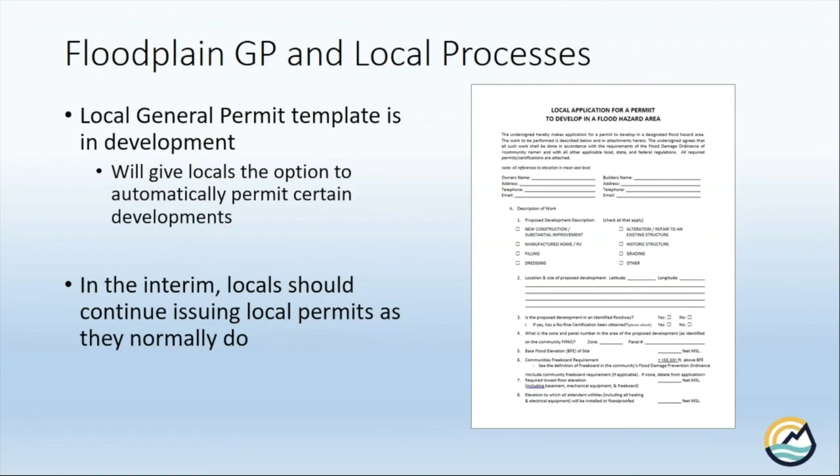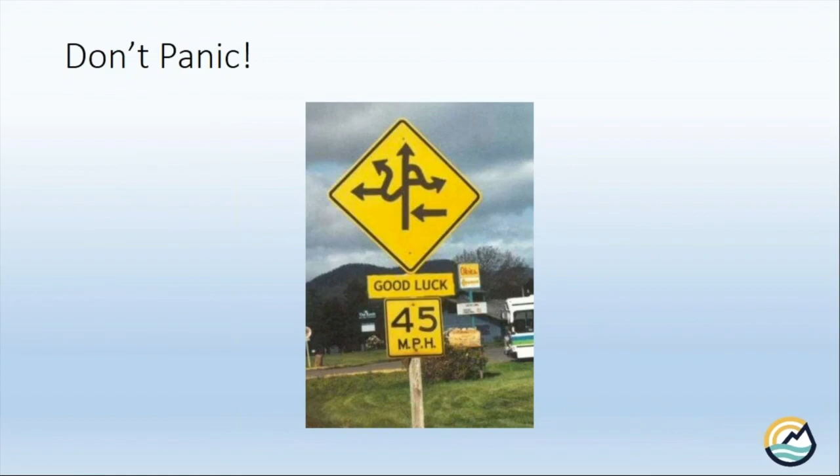We've gotten several already from people in the public as well as people at the state in the floodplain management section itself asking us, hey, what about this? Have you considered that? Where does this fit in? We absolutely encourage those because we knew when we put this together there were going to be things we didn't think of. So once this is posted online, go back and give it another watch. But if you still have questions, absolutely reach out to us. We are here to help.